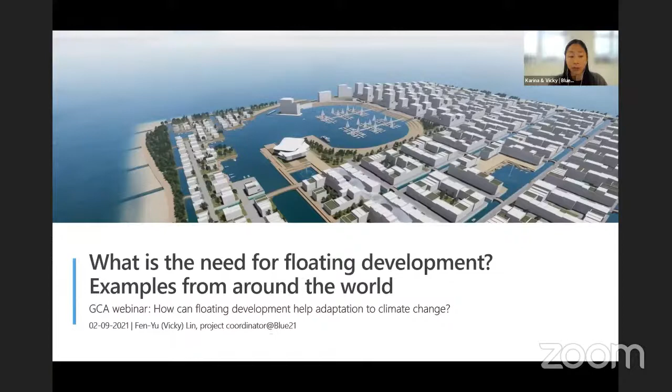First of all, what is floating development? Floating development usually consists of a superstructure that has a function of, for instance, housing, recreation, energy, or food production. It also has a substructure or floater made of steel, concrete, or other materials. It is usually fixed at the bottom of a water body so that it doesn't drift away, but also has the freedom to adapt and move according to changing water levels.

Not to be confused with stilted houses or amphibious houses.

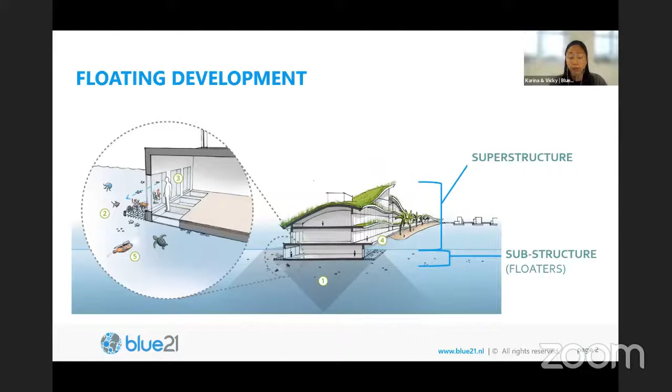If we look at the critical global challenges for 2050, we can see that more cities still need to be built while facing the projected sea level rise of up to 30 centimeters. This is also confirmed by the newest IPCC AR6 report. And the fact is that 50% of the global population is living within 100 kilometers of the coast, posing a huge threat to the coastal community.

How are we going to do this? At the same time, if we continue to produce and harvest food the way we do, by 2050 we would have a shortage of land the size of North America in order to feed 10 billion people. Where are we going to find the space?

Most cities resort to the more conventional way of creating space, which is land reclamation. But the reality is that we are running out of sand. There's an alternative solution, which is to create new space on the water. In fact, a lot of solutions are already available for different applications, and it is possible to create a closed loop and a circular urban metabolism with floating development.

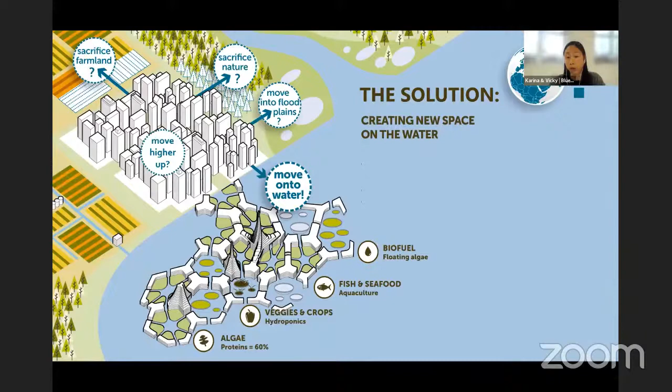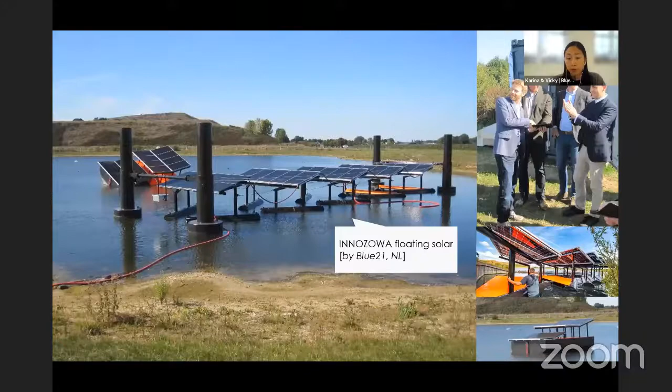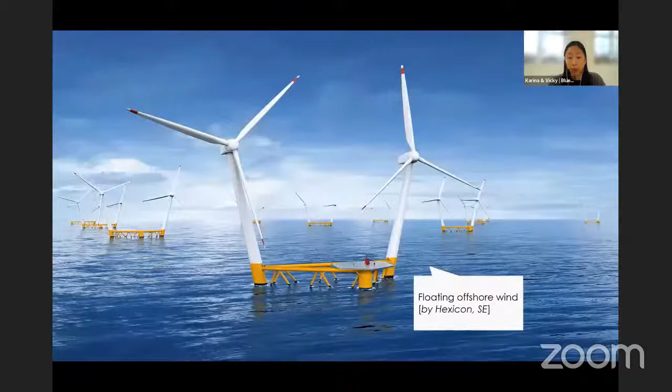I'll show you some building blocks and some examples from around the world. Most people are now probably familiar with floating solar, not only for inland applications but also for offshore. Different designs have been explored, as well as for offshore floating wind and floating aquaculture at very large scale.

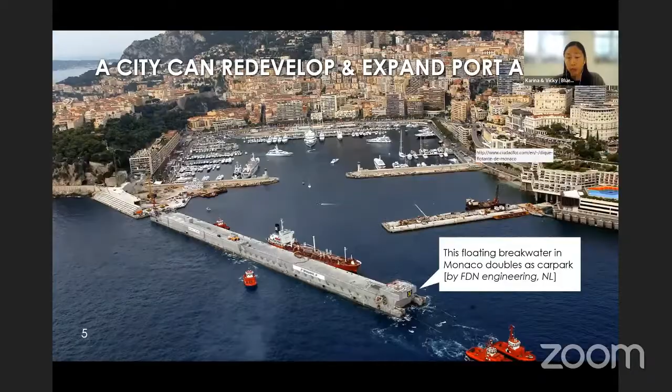In fact, floating community or living on water is nothing new. It can be observed in the past and at the present with different technologies implemented. There are also some experts looking further into the future, creating floating development at a city scale, including us.

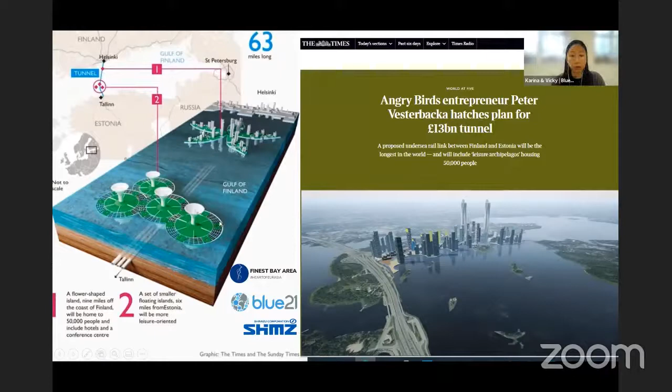This is one of our recent projects where we work together with our partners, Shimizu Corporation and Finest Bay Area Development, where we plan to introduce large floating settlements in the Baltic Sea around the tunnel initiative. On the left, you could see the mega float city created by Shimizu called Green Float, where they would introduce large floating structures for housing, recreation, as well as food and energy production.

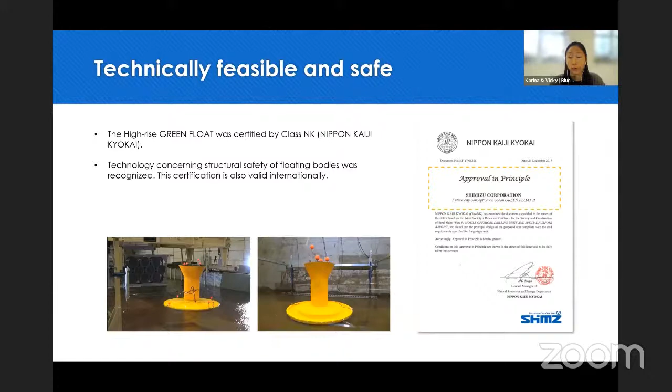Such a design has already been tested in numerous basin tests, as well as numerical computations. It's proved that it is technically feasible and even safe, which is often the concern of a lot of people when it comes to living on such large scale floating structures.

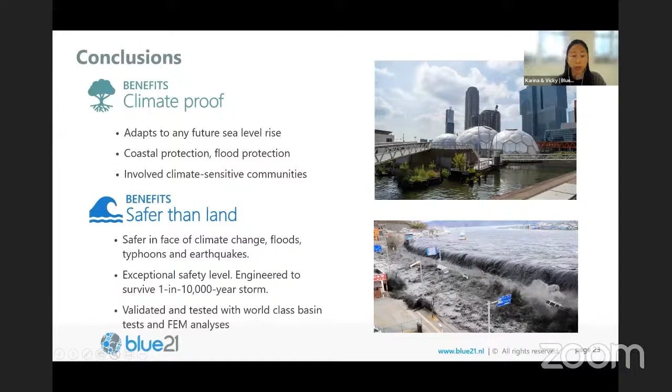In conclusion, floating development is climate proof and future proof. It can adapt to any future sea level rise, providing protection for the coast against flooding. It can also be safer than land in face of climate change and other natural disasters such as typhoons or earthquakes. It can provide exceptional safety levels, and it can be engineered to survive, for instance, a 1 in 10,000 year storm. But not only adaptation, floating cities could also contribute to climate change mitigation, reducing greenhouse gas emissions while achieving numerous UN Sustainable Development Goals.

Last but not least, a little about us. We are Blue 21, a multidisciplinary team of maritime urbanists who are also pragmatic visionaries with 14 years of experience and knowledge on design and engineering of large-scale floating cities. We value collaboration highly, and we focus a lot also on creating impact.

Last October, together with other partners, we successfully organized Paving the Waves, the second World Conference on Floating Solutions, where we brought together stakeholders from both public and private sectors to discuss and share their state-of-the-art findings on different types of floating solutions. To know more about the conference, please visit the website shown here.

Our mission is to provide resilient and circular living spaces for billions. Our vision is that we have to take a step-by-step approach, starting first near shore and eventually further offshore into creating large-scale self-sufficient floating cities. Only when we do this at a large scale can we really tackle the critical challenges to create a more sustainable and better future for all.

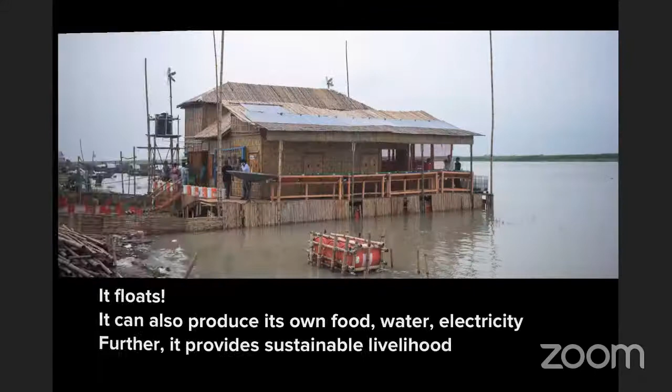So I hope you have seen the video and you have many questions in your mind, how it works and how did you do that. So the home floats uninterruptedly during flood with a buoyant platform of 40,000 kilograms or 40 tons in weight. The home would also stand a category 3 windstorm. In local terms, we call it cyclone or tornado. Therefore, it is resilient to coastal and inland storms. It would also stand an earthquake of category 8, measurable on the Richter scale out of 10.

The home would produce adequate food for a family by maintaining appropriate dietary balance and nutritional security. Carbohydrates were sourced from 4,000 vegetable plants cultivated inside the premises, mostly utilizing the outer walls of the house. Protein demand was met by 216 chicken birds and 2,000 fishes cultivated in the hydroponic and aquaponic system in the premises. Freshwater was sourced from the sustainable rainwater source.

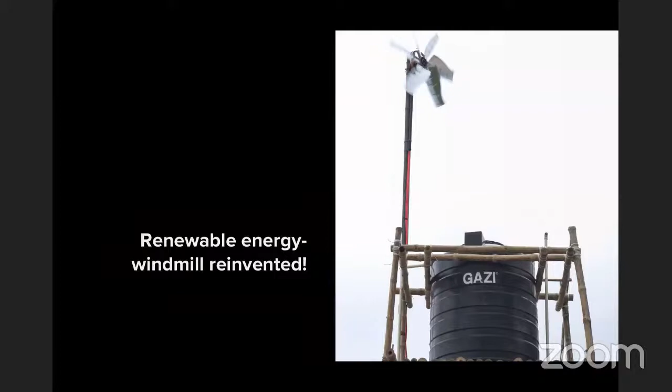A total of 17,000 liters of fresh drinkable water would be stored in each home to support more than 150 days of consecutive dry period for a 6-member family. The quality of water was maintained by an innovative double filtration approach developed by the team. A wind turbine coupled ram pump technology was invented and tested to lift the water to an overhead water system. Therefore, the water available in all the taps was of drinking water standard.

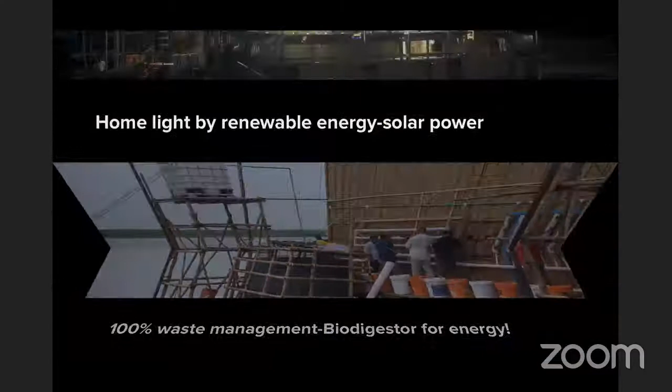The house was fully supplied by renewable electricity sources. A 15,100 watt solar PV panel backed by an innovative technology of solar concentrator, wind turbine, and biogas generated electricity option was also the first of its kind in Bangladesh and other similar countries. Sustainable livelihood provision was one of the key features of the home. The home is able to generate a standardized income for a family of 6 members, not only during flood, but also during the dry periods, all around the year, from poultry, fish, and vegetable production.

The reason why we call it a dream home, not a flood resilient home, is because that's the name the community preferred. It was very much a community driven initiative. We empowered 15 very vulnerable families to join in the process of co-design and co-production. And then they came up with this design of flood resilient home. What we did, we used computer software and designers to make it presentable to the rest of the community.

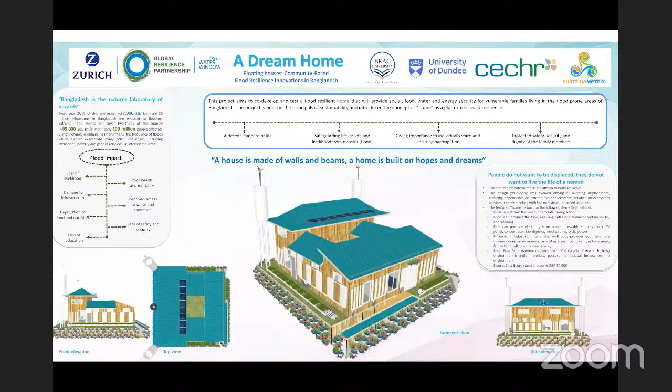The major lesson learned from this process was, as I said, it was a technically sound initiative, and the acid test was done because it survived 2 consecutive mega flood seasons. But what happened after 2 years, when people realized that some poor people are getting benefit out of that, some serious theft incidents were reported from the construction site, despite all the materials being stored securely in 2 separate construction sheds. We made some police reports and involved the government administration, and we also employed 5 security guards at the site.

But the communities were confused because this is an agriculture-based production system. Benefit doesn't realize fully even after the first year of operation. So estimated loss from theft and new employment was estimated as $2,500, which was also unanticipated from our side. We ran out of budget, and that created a problem. So for each of the houses, we spent around $20,000 finally to build it.

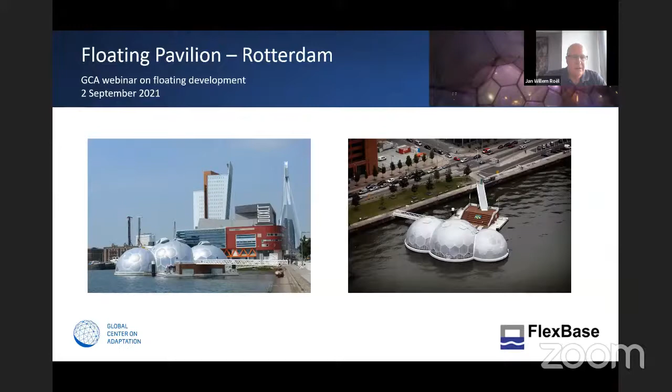My name is Jan-Willem Roël. I'm the founder and CEO of FlexBase in the Netherlands. I'd like to present to you the floating pavilion that was founded about 10 years ago as a center of, let's say, adaptation in the city of Rotterdam. First, I'd like to present a little bit about FlexBase. It was founded about 10 years ago.

At this moment, we have built about 6,000 square meters of floating, and we are at this moment establishing a company in Singapore that's called FlexBase International. The floating concept is a patented one and has to do with EPS and concrete. What is very nice about the system is that it needs hardly any maintenance, it is very long lasting, and it is fully recyclable.

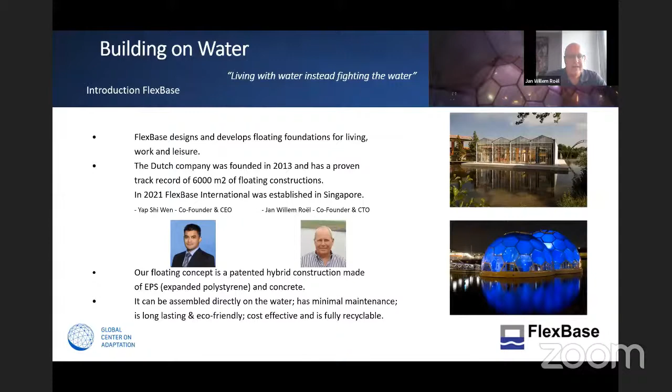But also regarding the cost, it is costing less than a concrete or steel barge at that size. I can show you some of the projects that we've done: a greenhouse in Holland, an office in Amsterdam. We also did a floating house project in Manila. We did an amphibious floating house project in Dhaka. And last but not least, the floating lounge in Bahrain.

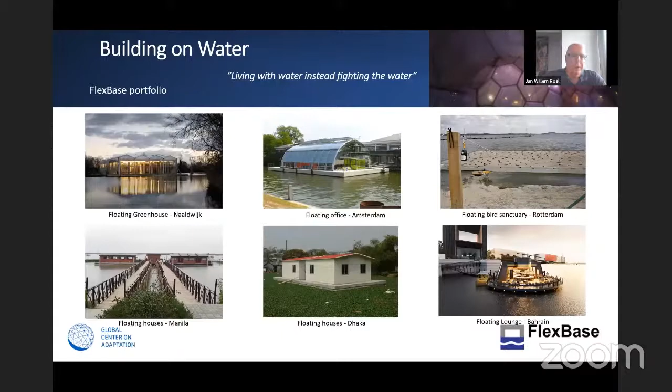To tell you a little bit about the floating pavilion as a start, the client is the municipality of Rotterdam, to show what we should do around climate change. And we had some real requirements. It should be climate proof, minimize the CO2 footprint. We already had in the beginning that it should be domes put on top of it. It would be two structures, the pavilion and the square, in total about 1,400 square meters. We had to put basements into it and a very short construction time because of the Tour de France that

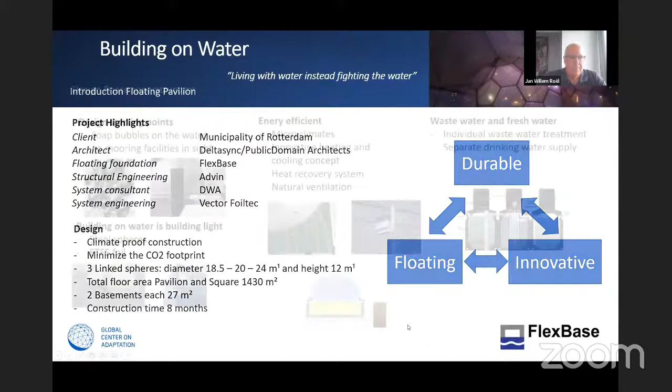started in Rotterdam. So to take you a little bit through the design starting points, it should be soap bubbles on the water, and there should be no mooring facilities in sight. So we looked into how to build it very light, because that has to do with the water. Everything you put on top of it, you have to get buoyancy again. So we work with a steel sphere. We first started with glass in the steel, but that was far too heavy. So we ended up with ETFE foil, which has already been used at the swimming pool in Beijing, for instance.

We looked very much into the energy efficiency with microclimates in the building. We had a very innovative heating concept that's coming from the greenhouses in Holland. The cooling concept was also rather new, with extracting water from the air. We had a heat recovering system with salts that were getting fluid in the day and giving out the heat in the night. And of course, the very efficient natural ventilation, getting the air over the water surface into the building and getting the warm air out.

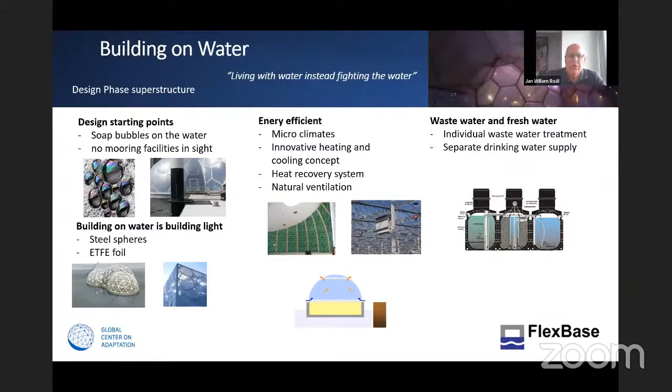Then finally, we did a lot on wastewater and fresh water. We had an individual wastewater system in one of the cellars, and we used that cleaned water as toilet flush water again. The innovative design for us as the float was that it was round. And that was very special. Then we had to bring in the compartments for the cellars, as you see in the middle picture. But also we built it in another location than where it was finally put.

Regarding engineering, we had a lot of issues regarding how to engineer, to what codes. We had to deal with stability and tilting, buoyancy, of course. Then also, because we're building on water, we have to look into the manufacturing process, because a lot of loads are getting onto the structure while pouring, for instance, the concrete. We had to deal with the waves and the water current, because we have a tide difference of about 3 to 3.5 meters at that location. We had some marine requirements, of course.

One of them is the bridges, because we needed 2 bridges regarding safety requirements. And a very special feature regarding MEP piping that was all in the floating constructions. We had to get very special connections, because we could not moor the floating pavilion with poles. So we had to develop something else. We had very uneven loads, because inside the spheres we had a conference room. We had to deal with trim facilities regarding the flexibility of the total structure. And also we needed all the point loads to be taken from the spheres.

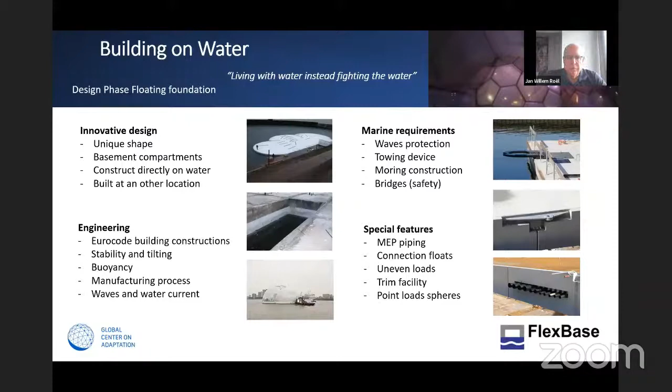So to take you a little bit through the building process of the float, you see here, we started on the water with the plates, and later on also with blocks. The total thickness of the EPS was about 2 meters, 2.1 meters. And then we put some concrete beams into it, as you see in the top right picture. And finally, we put also the side slabs to protect the EPS from collision. The floor is about 20 centimeters.

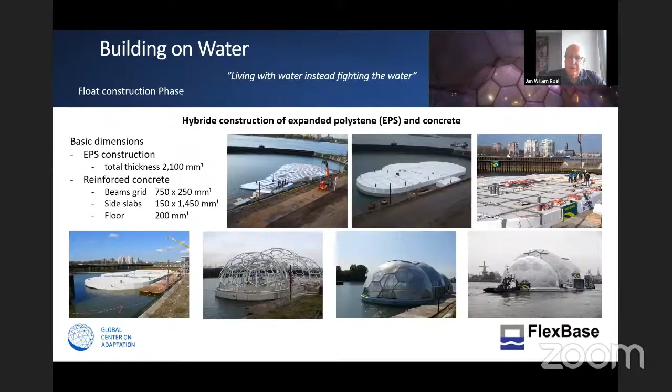On top of it, the steel structure for the domes was built, and then it was covered with ETFE foil. That was all done at the building location, and after that, it was brought to its final location, on the Rijnhaven in Rotterdam. Really, Rotterdam wanted to expose itself as the city that was dealing with climate change. They wanted to show that we could really build something that can be adapted to the water level rise. A lot of new ideas and inventions were presented in these domes. Living with water is really, really better than fighting the water.

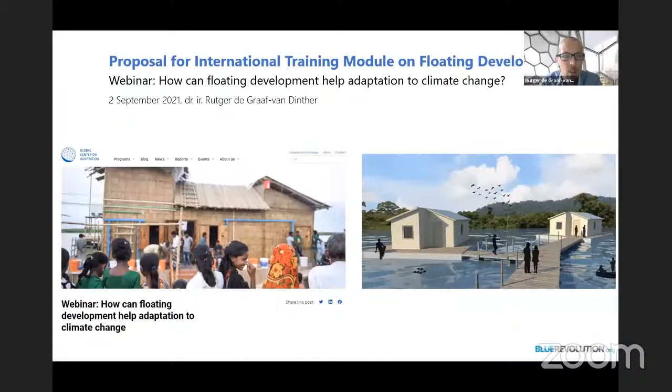I will be talking about the proposal for an international training module on floating development. A little bit of introduction about myself. My mission is to enable climate-proof floating development with a positive social and ecological impact. I've been working on this for the past 15 years in different roles, as chairman and co-founder of the Blue Revolution Foundation, but also as director and co-founder of different companies involved in floating projects.

I'm also the co-initiator of the Floating Pavilion Rotterdam, a very interesting project, of which we heard already a lot today. I was involved in the Second World Conference of Floating Solutions as keynote speaker and co-chair. I'm also the editor of the book Climate Resilient Urban Areas, published by Palgrave Macmillan. And one of the chapters, the 5 pillars of climate resilience, I wrote together with Henk Ovink, the national envoy on water management of the Kingdom of the Netherlands.

And I'm also co-initiator of the National Research Initiative Floating Future, together with the Maritime Research Institute Netherlands. So it's not surprising to you that I'm very interested in floating urban development. So why have we proposed an international training module on floating developments? We have noticed that floating developments can have global potential to contribute to climate-proof living space and support urgent urban transformation to resilience. However, we also see that current projects are still quite small and require scale. If you compare them to the scale of the climate threat of our cities, this required scale is still lacking.

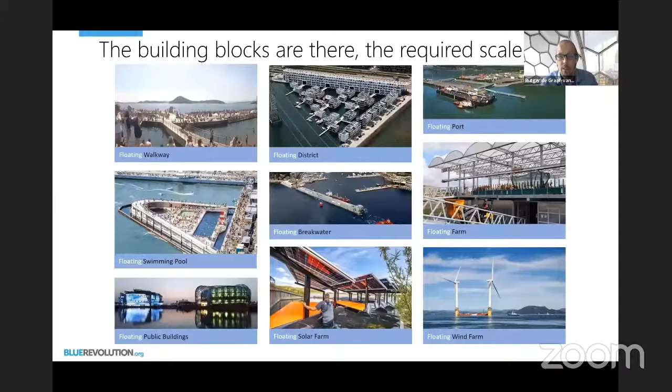So we think that awareness and knowledge about floating developments need to be strengthened globally to enable wider application of this technology. As also shown in previous presentations today, the building blocks and technology are there, but we need to increase the scale of these applications. One way to look at this is the framework of receptivity. Receptivity is a theoretical scientific framework that I also used in my PhD. And it's about the extent to which there not only exists a willingness, but also an ability among stakeholders to absorb, accept, and utilize innovation options.

And there are four components or attributes of this receptivity framework: awareness, association, acquisition, and application. Awareness is really about the stakeholder sense of urgency, and also that the status quo is no longer sufficient and that there are alternative options. Association is the ability of stakeholders to link floating developments to their own agenda, objectives, and interests. Acquisition is the ability of stakeholders to plan, design, engineer, implement, but also operate and maintain floating developments.

And application is the ability to have sufficient legal and financial incentives to really apply these innovation options, floating options, in practice. So all of these four components need to be in place really to support behavioral change and implementation of floating urban development. There are already capacity building initiatives going on. Today, our webinar really aims to contribute to strengthening awareness. Also, innovative pilot projects such as the floating pavilion have that purpose.

On the association level, for instance, on the international policy level, we have noticed the UN high-level roundtable on floating cities, which took place 2 years ago. More locally, we have started the think tank Governance of Floating Cities. Research programs such as Space at Sea and also the National Research Initiative Floating Future aim to strengthen the capacity and knowledge of stakeholders. Also conferences such as Paving the Waves have that objective.

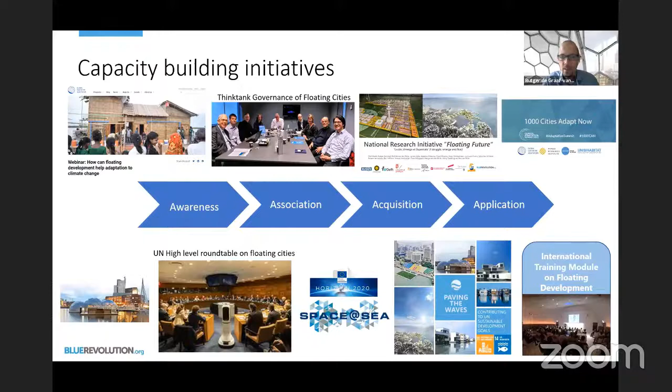I want to stress that there's a need for an interdisciplinary approach. It's not only about technology, but the social impact and ecological impact are just as important, as well as not only talking about science and research, but also about application and practice. So we really need an action research approach where we study and implement at the same time, because we don't have time to study forever if we consider the urgency of climate adaptation challenges in cities worldwide.

And we also have interactive workshops: governance and planning, organized by me; technology of floating and amphibious structures, organized by Jelle Vedder and Jan-Willem Roël; and food and energy by Peter van Wingerden and Vicky Lin.

The objective is to increase awareness and knowledge of floating urban development as an option, not the option, but an option, to increase climate resilience among city policymakers, professionals, and planners, and to do this globally. Also to strengthen the international knowledge network for climate resilient floating developments. The platform will most likely be digital. The duration will be 1 day, and we're looking at a group size of about 15 to 30 people.